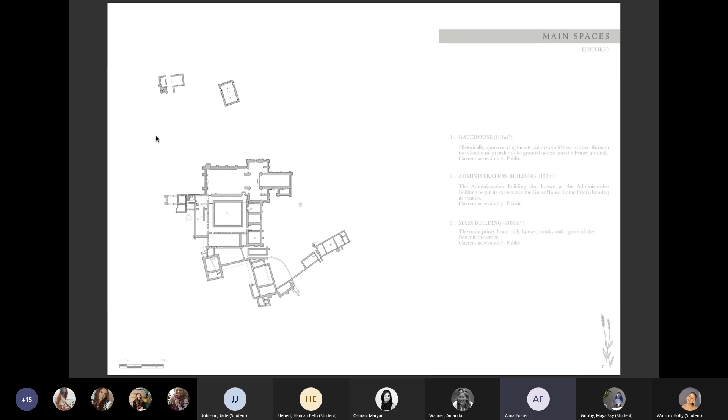So these are the main spaces. The big floor plan is the main ruin, and at the top I had a gatehouse and an administration building.

It was in a really strange location, like in the middle of a really dense housing estate, and then you'd turn a corner and it was just open green and really stunning. When you stood at the north of the site and looked south, it was all just the landscape, so it was really beautiful. In comparison it was a really nice contrast.

And you can see that all the houses are around.

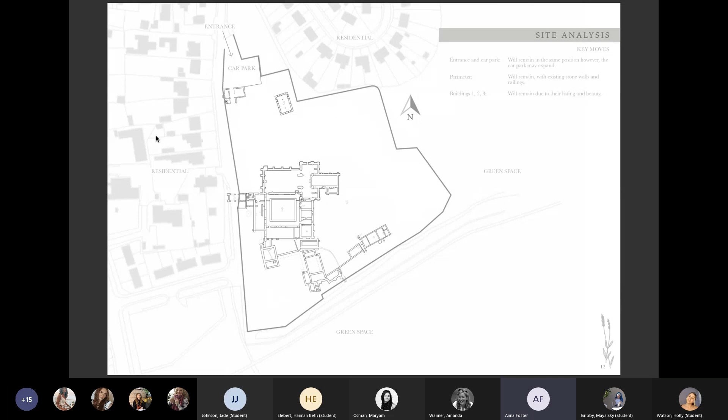There wasn't actually any plans for the site, which I would not recommend at all, so I drew all these up on site. I hired a drone off a really nice guy who let me do it all for free, which was really nice of him.

I took the iPad and took CAD and literally just sat on the grass with my Mac in the middle of Barnsley - would not recommend - with an umbrella over me, and drew these up.

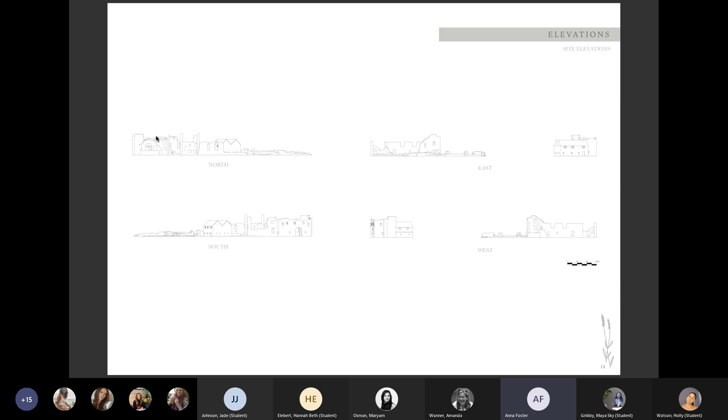These are the elevations, and as you can see there wasn't loads left of it, but I enjoyed that there was a solid floor plan to work with, which defined my spaces. It was quite overwhelming at times because it was a big site, and obviously there isn't masses left of it.

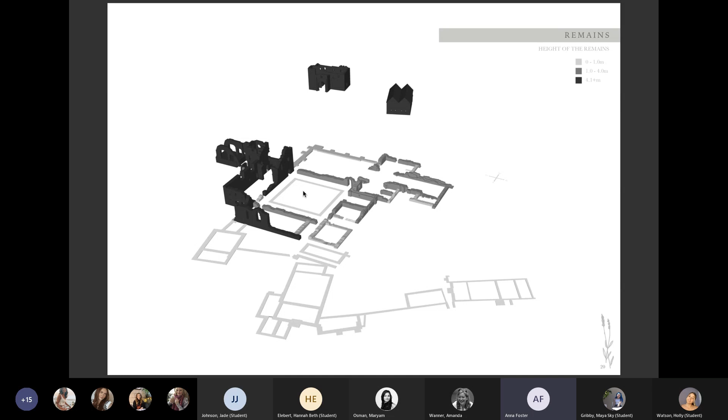But in the sense that it was mapped out, it was quite handy because it almost gave me a route around the site. In the centre, where that square is, that's the cloister - that was actually originally open, like their garden. That was nice to link to the route around site, because that could then be my main garden where all the herbs and natural remedies would grow.

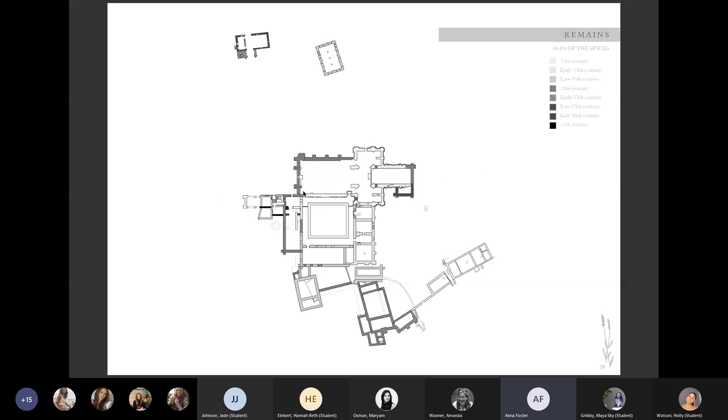Just the ages, and then the different spaces, and then this was part of the drone photography I did. For each space I did drone photography, a little bit about the history, the floor plans and elevations, a little model, and then either concept or key moves.

So from the history of the space, I figured out what concept I was going to take forward into my brief. For example, with this one, this is the gatehouse that was at the front of the building, and everyone would pass there usually. Even though when I actually went, the site was totally open - you don't have to go through the gatehouse at all, it was all just vast space you could walk through.

When it was originally a monastery, everyone would have to go through the gatehouse. So I ended up creating that concept into my design, making sure everyone had to walk through there, and I ended up doing it with hedges to make it more natural, fencing off the vast open space you would usually walk straight into.

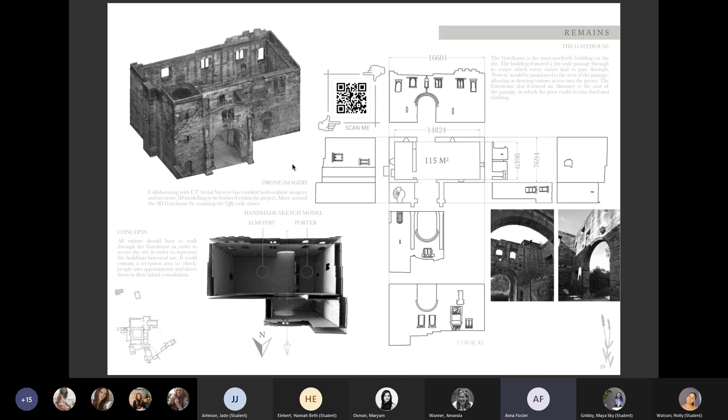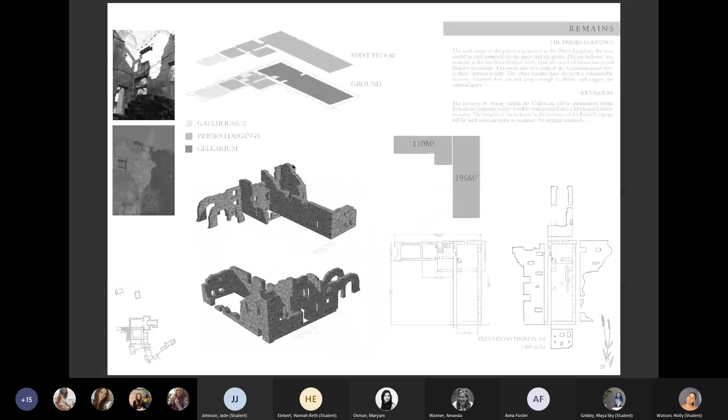So I just really linked every single space to a concept that was to do with its original use.

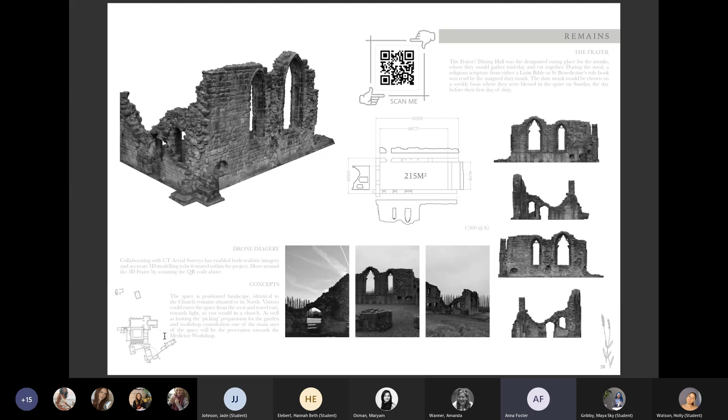I'd also really recommend doing this in the corner, if you've got a big space like mine - just highlighting what space you're talking about. Because when you talk about your project like 100 million times, to you it's really obvious, but I think it's good when you're speaking to someone else so they can keep up with where you're going on about.

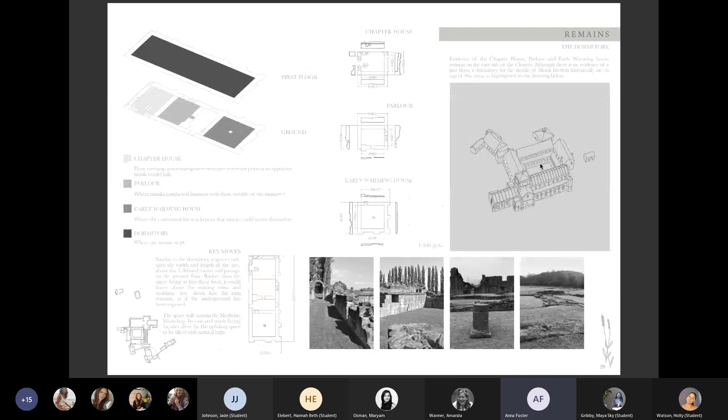Oh, and this is a drawing of how it used to be. So when I was talking about the central garden, that's the space in the middle. And that's just the ghost of the building over the current ruin.

About Benedictine monks - this was the Benedictine monk timetable, which was actually a lot busier than I thought. When I think of monks, I kind of just think of peaceful, resting, calm, but it was actually quite full on. They'd wake up at 2 and then go to bed at 6, and they'd just be on a constant rotation of jobs, chores, and things.

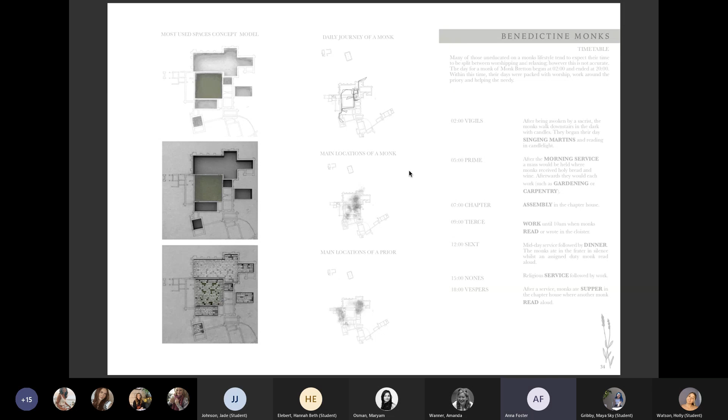So I focused on the route around the site and where the main locations were, and I used that concept for the wearable concept. So my wearable concept looks quite dark - it wasn't intended to be so dark looking.

I dressed in a tunic like the monks would, and Benedictine monks wore black, so that's how I was in black. And then I was on a puppeteer structure to show the control that the prior had over the monks - obviously willingly, so they were allowing themselves to have that control.

When I did the hand-in, I was led by my friend who was dressed in black, by this rope around my waist - so that was them leading. Then I had a rope to my arms and my feet, and I had the timetable names like Vigils and Prime across my face to show the lack of identity you had - you were all just one of the monks, you weren't John. It's just removing that identity, and the identity of the person before they became a monk.

It's really hard to try and remember everything. I think that's it - that's great.

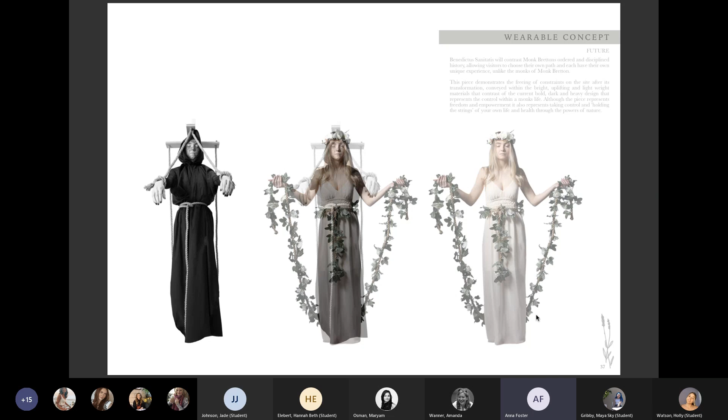I ended up handing it in as a pair, so I did the contrast afterwards. That's kind of taking the own reins on my health and how I tried different things to try and basically just get myself out of a really horrible time. So it's taking the own reins, and nature taking over, wrapping around the rope.

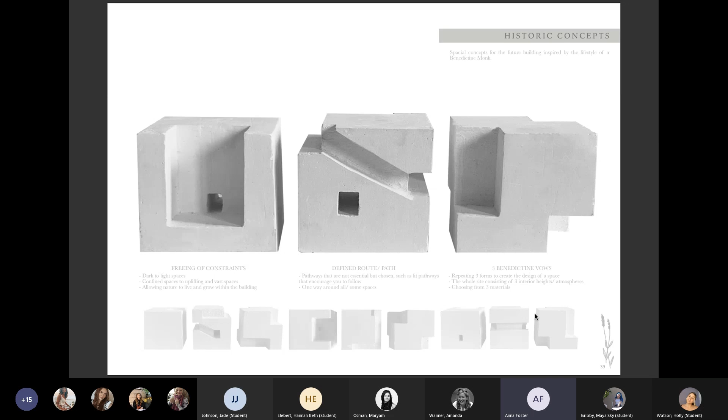These are some concepts: the freeing of constraints, defined path and route, and the three Benedictine vows. I ended up using them all quite subtly, and I explained where I'd used them within the design afterwards. But I think the main one I used was the three Benedictine vows, because that was the pillar of being a Benedictine monk, basically. So this concept of doing things within threes.

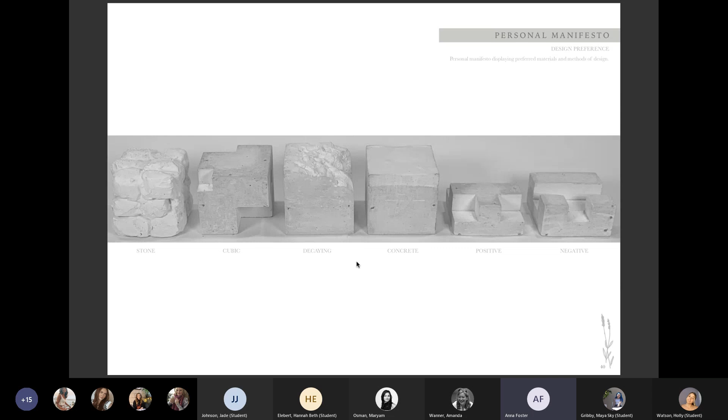This is my personal manifesto of how I like to design and everything I like. I guess the decaying aspect and the stone aspect ended up being within my project quite heavily, which is why I chose the project. It was really attracted to me. This is my personal manifesto.

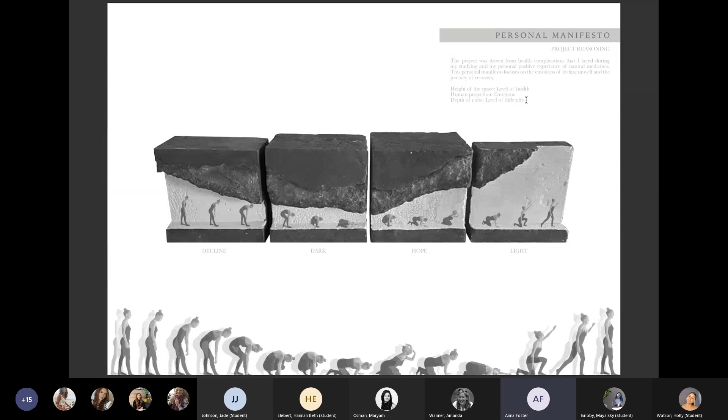It didn't actually photograph very well, but I acted out how I was feeling across the illness and how it got worse, then there was hope, and I ended up getting better at the end. I put that into stages and decayed the rock to represent each stage. So the height of the space represents the level of health, the human projection represents the emotions, and the depth of the cube represents the level of difficulty.

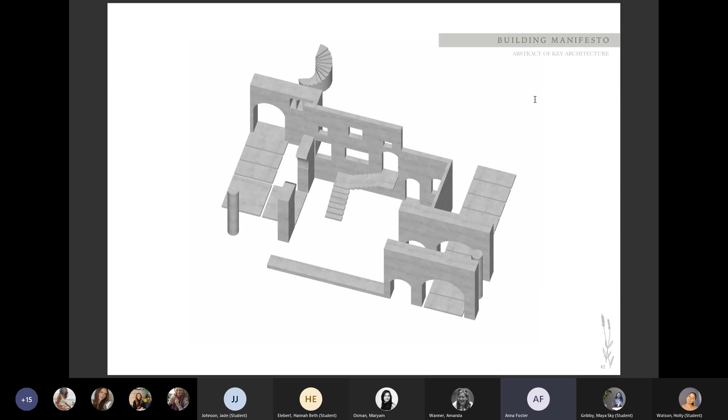I used the floor plan, but I didn't use the current architecture. I literally drew over the floor plan into a shape, and then put these shapes that I'd taken from site over them. So it's really abstract, but it gives you the language of what's currently there. And here I just explained where I'd got all of these different shapes from.

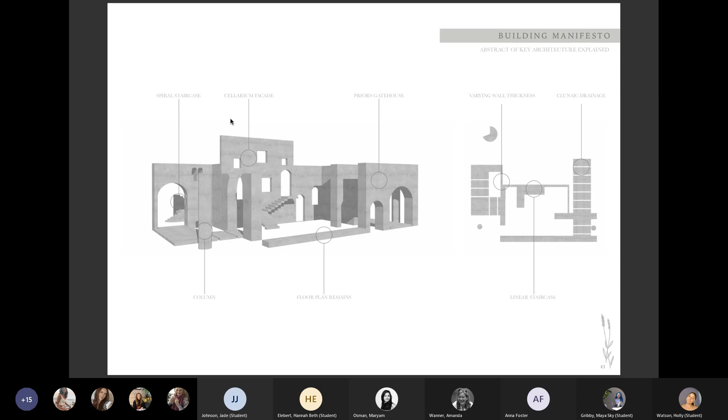That's turning what I did before into something a bit more conceptual, using the three Benedictine vows—so repeating things three times, exposing the structure, and nature's takeover.

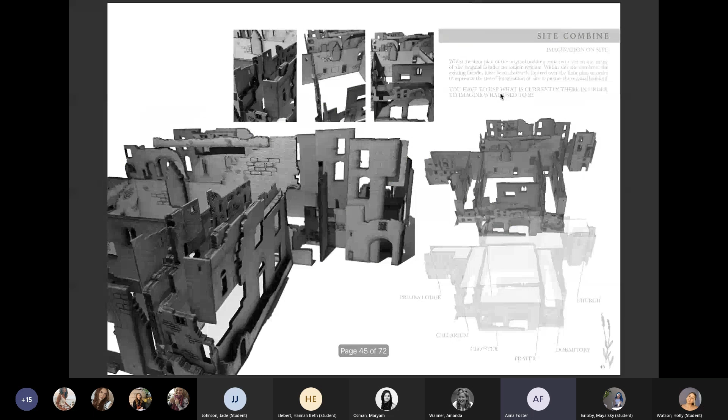This was my site combine, the same kind of concept as the one before, where when you're at site you have to use what's there to imagine what used to be. This one was really abstract, and I used the floor plan because you can see that now, but I used only the elevations that are currently there. So I layered and cut loads of those and laid them over each other to the height of what you would imagine it used to be.

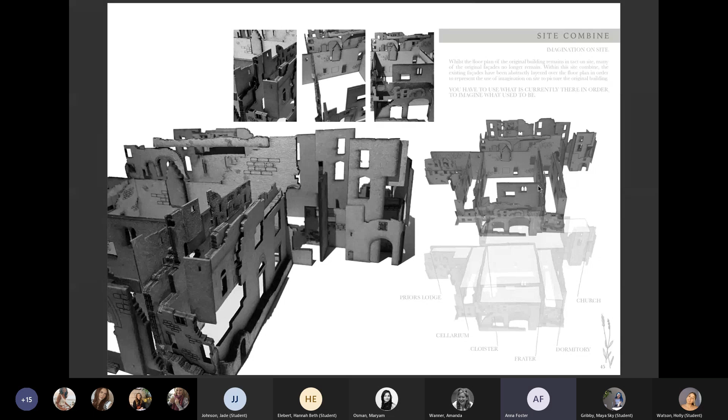Obviously you don't imagine it would look like that, that's why it's really abstract. But I used that to create some really eerie shadows, which you do actually get when you're on site. It gave you the atmosphere that you get when the sun sets.

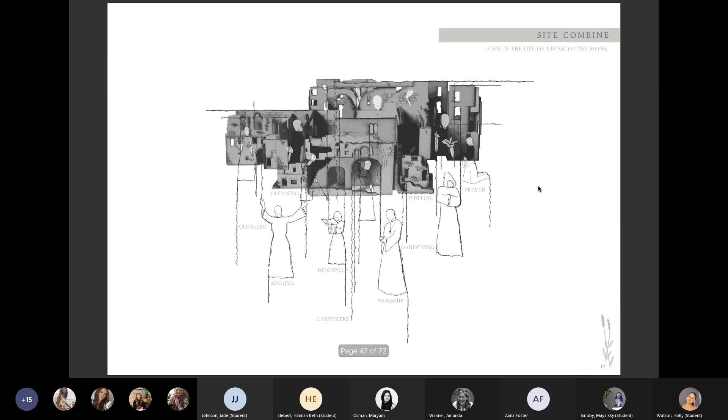This was just about the sense of sound that you get when you're on site. It's really silent as well, and considering it's in a busy residential area and quite near a main road, it's so silent when you're on the site, and you can just hear all the nature. Obviously this looks really dark, but you can hear all the nature, and it is really pleasant and nice. But I was thinking back to how it used to be, with the church bells and things.

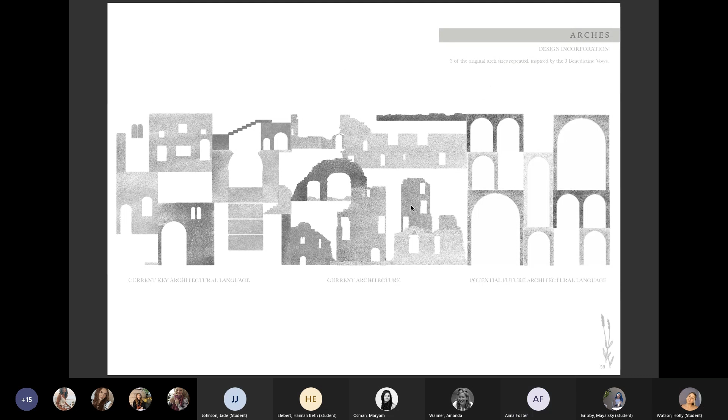So I got quite into arches, and there's a lot of arch language, or remains of arches, on site. And I just did some spatial concepts.

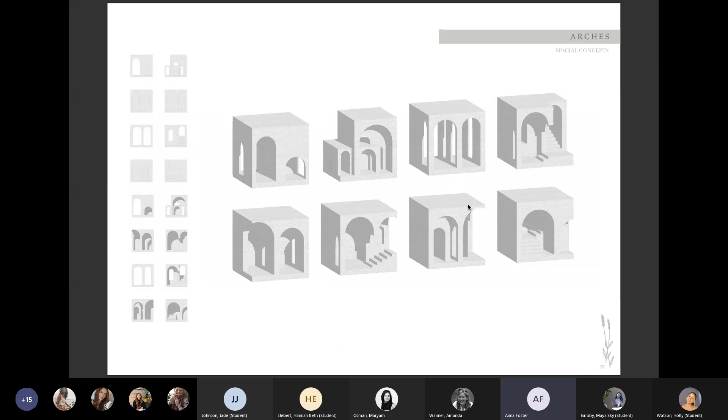I thought about how I could use light with the ruin—so having a wall and a light gap onto the existing wall, and light under the floor to show the ruin beneath. I actually ended up using this one, putting a flooring above my very small remains and almost making it look like it had been excavated, even though I'd actually just built on top.

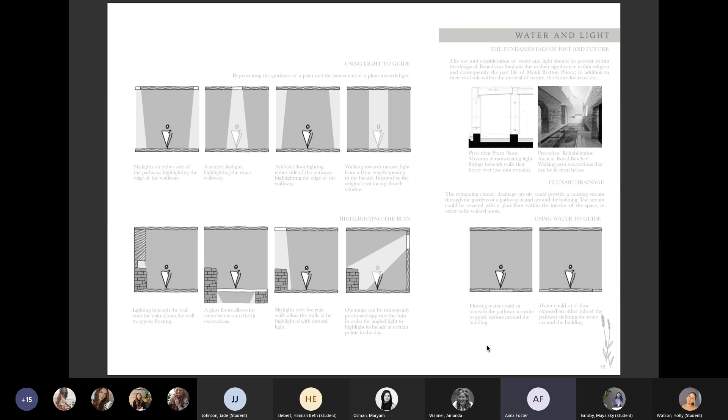And then I thought about water, because of the link to nature, and there was a lot of links to water on site with the old systems that were still partially evident. So water underneath the floor to guide you around site, or water on the side, almost creating like a moat.

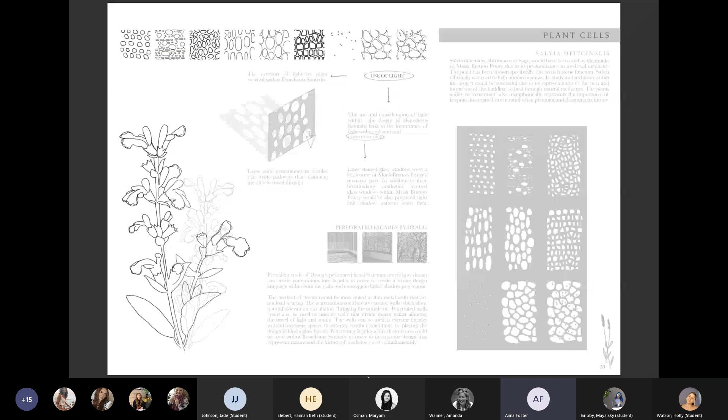So I specifically looked at sage and researched all of its forms, as well as plant cells and the structure of plant cells, and how I could use that within the installations.

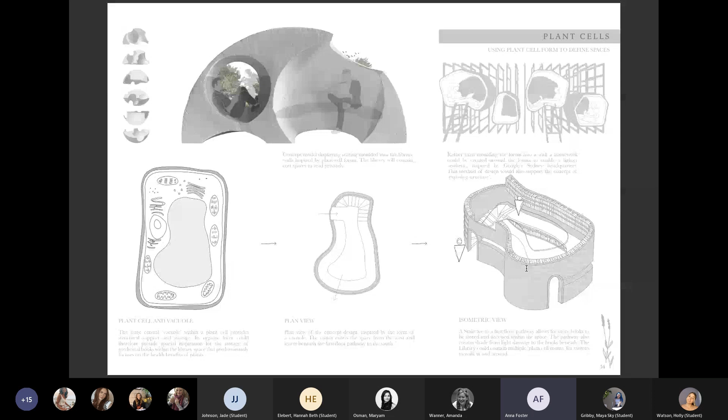These were my spaces: the library, the consultation, the medicine garden, the medicine workshop, the shop and tea room, and the sensory garden. Those were the major spaces, and the minor spaces were the gatehouse and the history of the priory, which was a small room dedicated to the monastery, plus a seedling house, picking preparation, workshop consultation, monastic garden, and garden storage.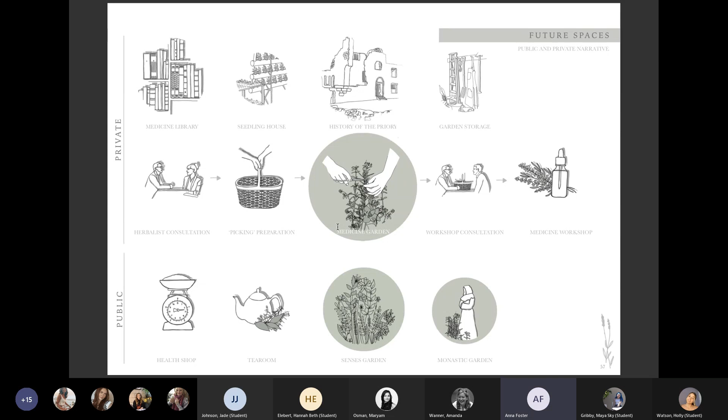I then did some diagrams to show each space and the journey a customer would go through.

Those are my future spaces, public and private. I labelled the outdoor and indoor spaces, because it was quite hard to show which ones would be outdoor and indoor, since the whole site at the moment was outdoor.

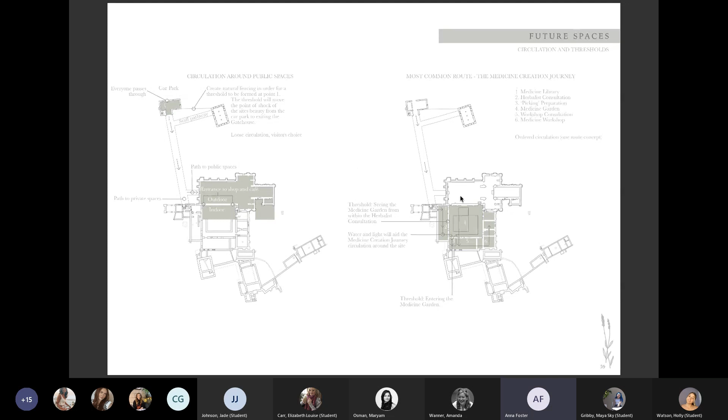And then this is my circulation idea, and these are my spatial concepts.

I was quite lucky with the site because there were a lot of concepts, as the history was so in depth. At the end of semester one, I wrote down all of the concepts that I'd gotten from the spaces.

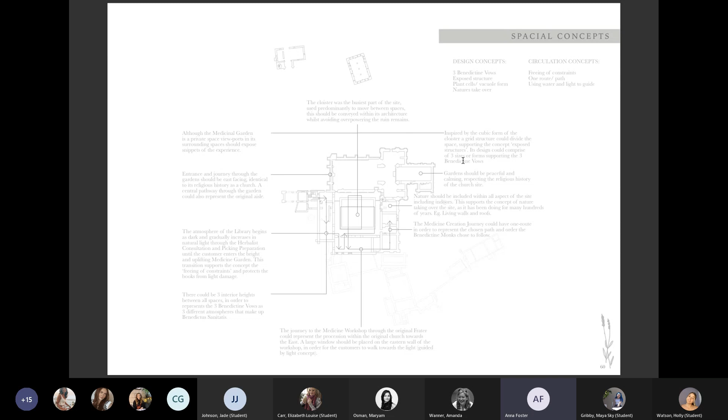It was quite good actually when I came to design in semester two and had a bit of a mind blank - you could look back and see all the concepts that link to the history.

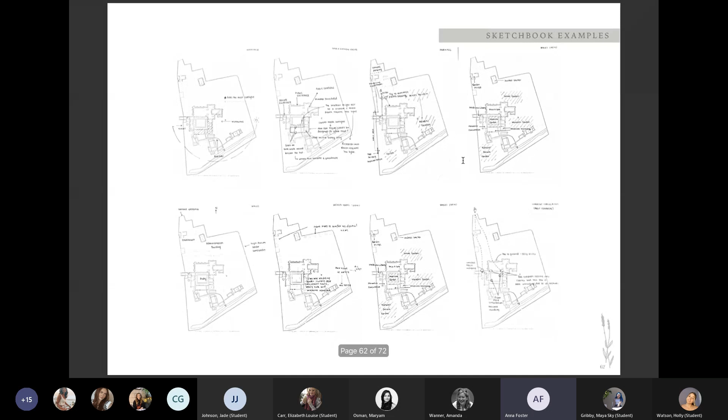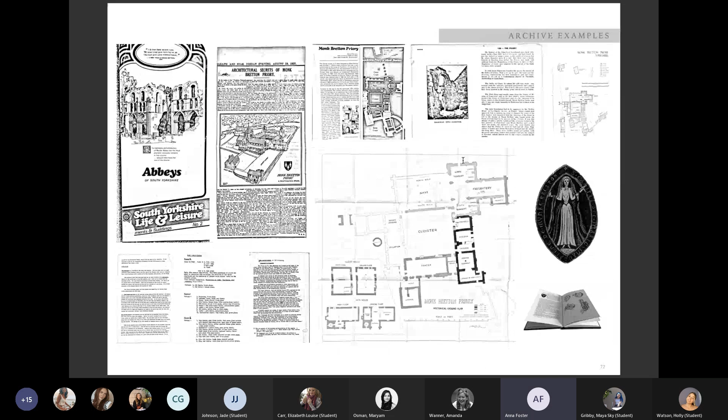I then scanned in some of my sketchbook - I didn't do all of it, just a few bits - some sketchbook pages at the end, and my research as well from the library. So that's semester one.

Am I going too fast, Maryam, or is that fine? No, it's perfect, thank you. Okay.

This was looking into the future structure of the building, and I did some lino etching as well of the ashlar and the rubble on the inside, of what construction remained.

It was really nice actually because all the elevations were missing, so I could get a full section of the rock, which was really nice.

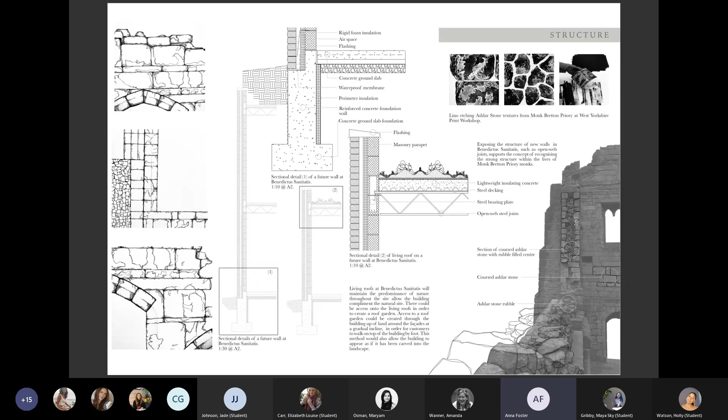So that was just the concept of the 3 Benedictine vows again, just exploring that.

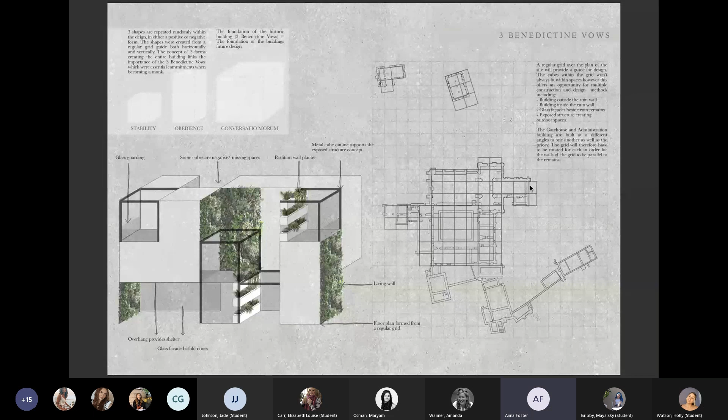I had a look into vertical farming, and I ended up designing my own system that was sustainable to the water on site.

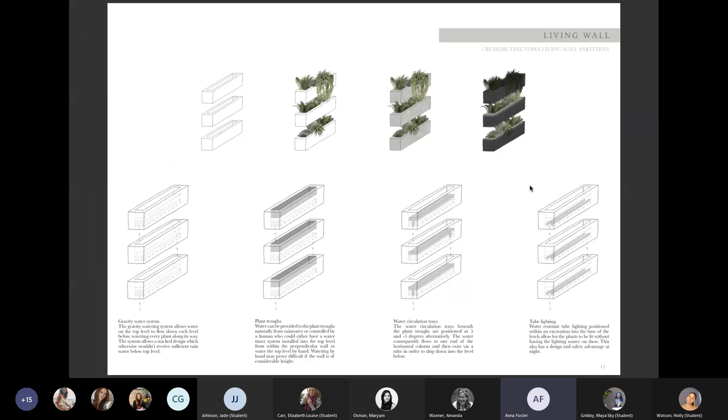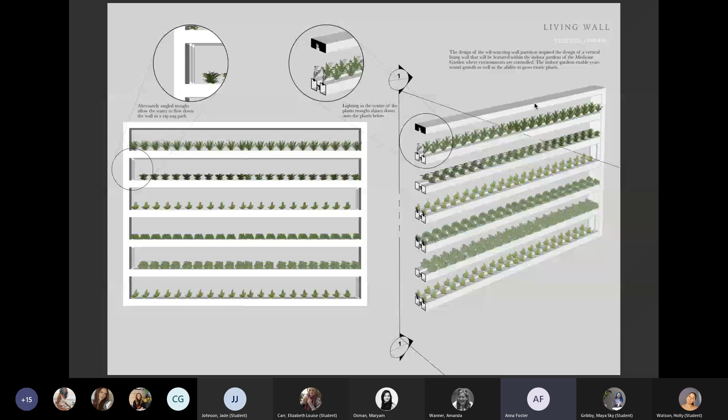This structure was used in the seedling house to grow the plants to a certain size before they were planted in the main garden. Arches again.

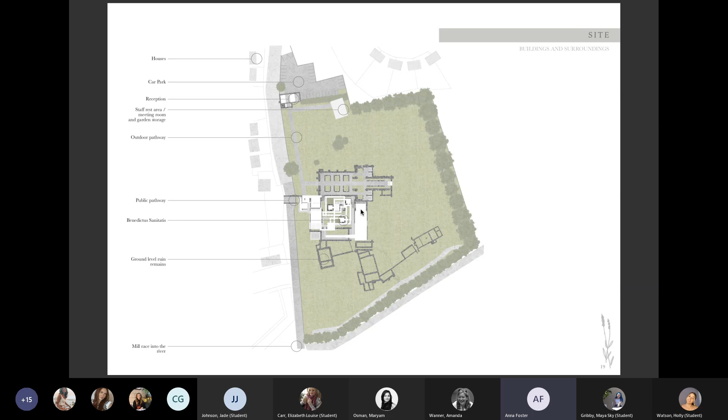So the sensory garden was open to the public, as was the tea room, and then the library was a membership, and the actual journey was private, so just on a booking system.

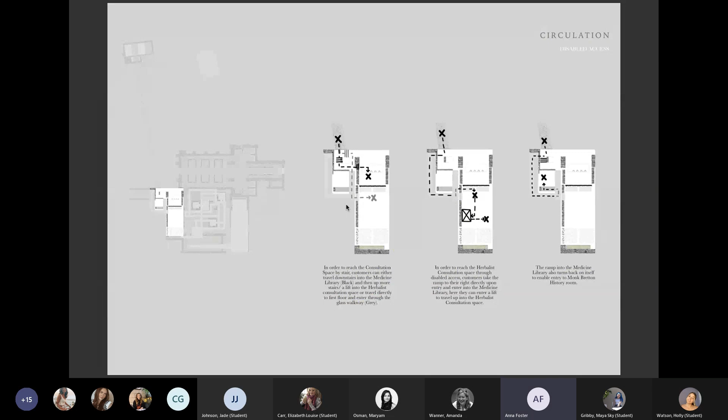So those are my public and private spaces, the route around the space, disabled access, and different seasonal routes, because obviously you can't go outside and pick the plants all the time.

Seedlings. I've gone off it.

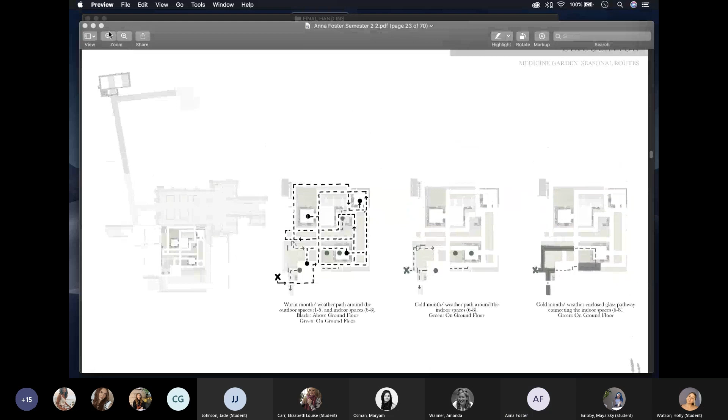And that would have the... I can't think of what they're called, like the plantation walls almost, and that was like feeding - obviously you'd fit a lot more plants in them than you would planted normally. So I ended up having 3 spaces that were kind of like a greenhouse with loads of those in, so that in winter the place could still be open.

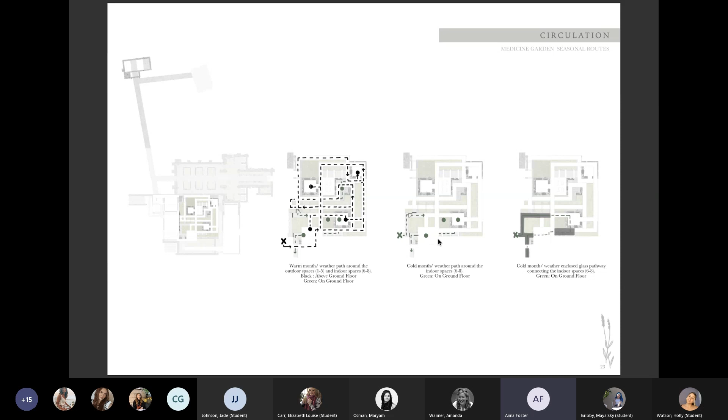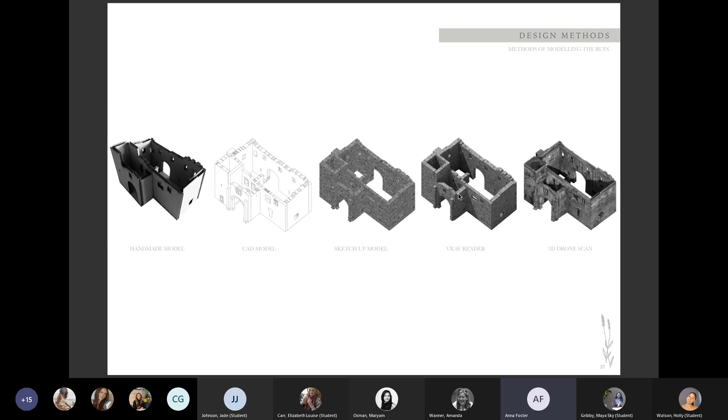And these are the floor plans, and these are the different design methods I used: a handmade model, CAD model, SketchUp model, a V-Ray render from the SketchUp, and a 3D drone scan.

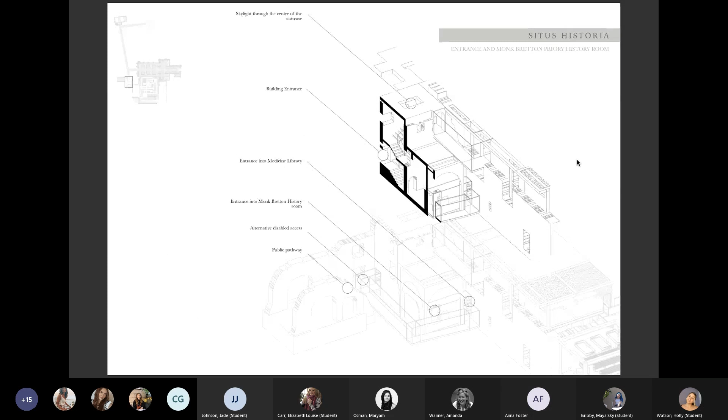And then these are all my spaces.

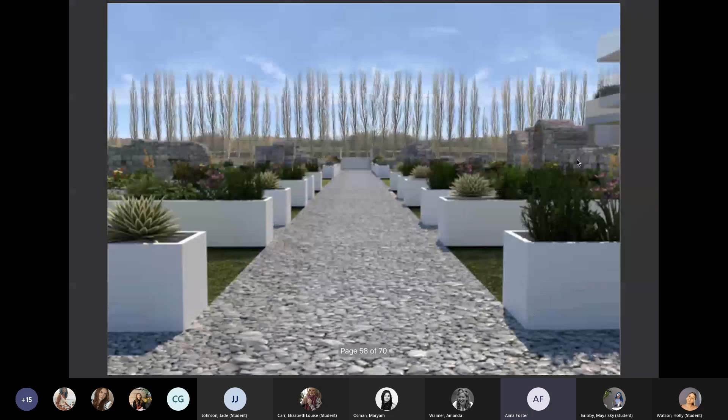That's the greenhouse room I was talking about. In the summer you'd go around all the different levels, and your list would be numbered. So you'd have all your ingredients in order - you might have 3 from garden 1, and it'd be obvious, I think there was 8 gardens. You'd go into the square - each garden was just a square, so you could keep track of which one you're in, numbered as well. You'd go on a pathway to all the different ones, and there was 3 at the bottom.

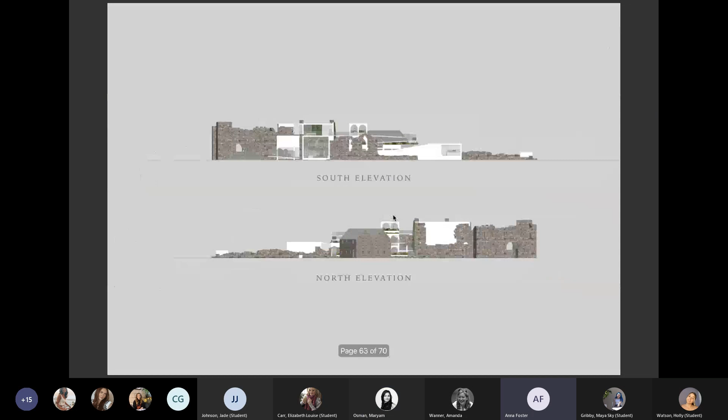For winter. Anna, do you mind just explaining your spaces through the visuals that you did as well? Yeah, of course, thank you. These sections you mean, or through the actual visuals? The visuals, yeah, and then these just kind of point out what the spaces are that you created. Oh sorry, I'm even breaking up - the visualizations.

Can you hear me? Yes, yeah, I can. Can you still see my screen? Yes. Right, it's gone.

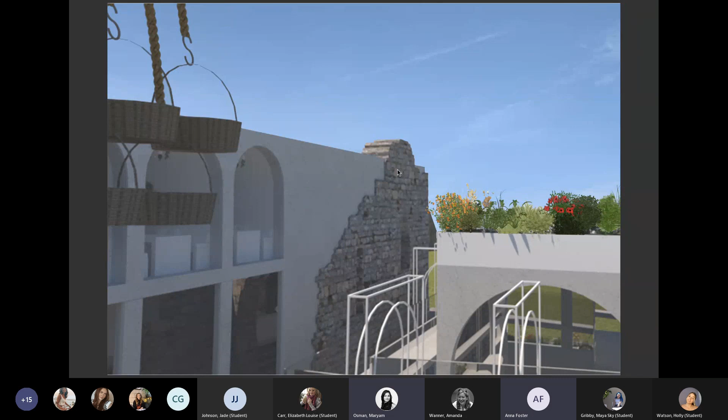Okay, did you just mean these visuals? Yeah please. So this was at the consultation space which overlooked the garden. This was the history room - so this is the site as it is, and then I had projections of all the archive material on the wall. It's quite a dark space, so the projections would be nice and bright.

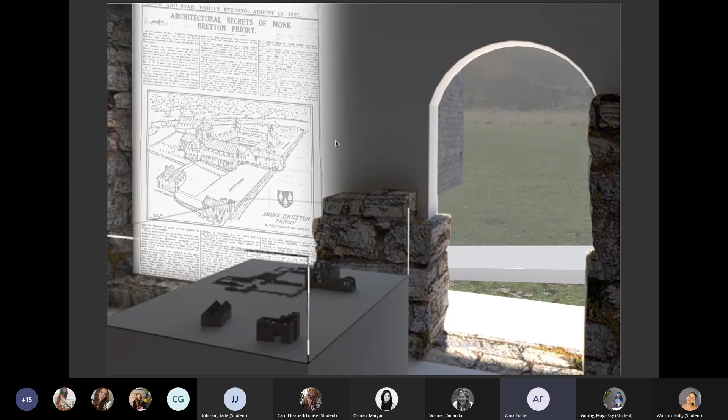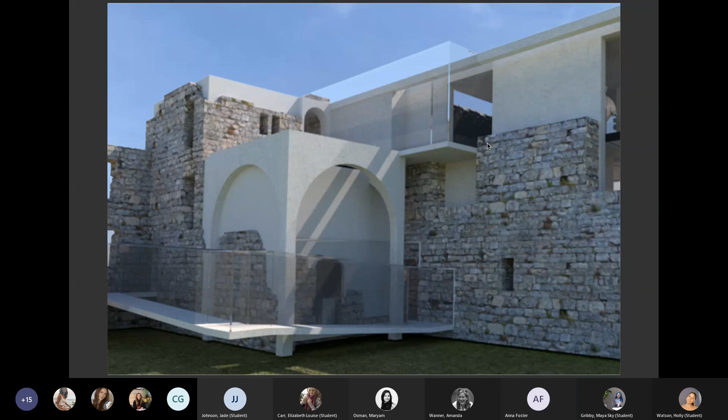This was from the side of the site - this was the history room, and this was the consultation space up here. So you'd walk in here, and that was the history room we just saw. That's the main staircase, and then I had to do a path round here and into here, which is actually there, so that I could have a lift.

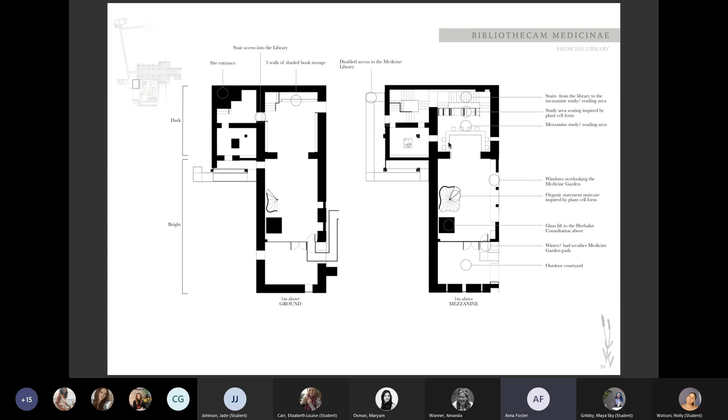That was really hard actually, because there was just stone staircases right in the entrance. I had to try and find another way for a lift, and I managed to divert the route. Then there was a library under here, and a study space that was a little bit higher, which is up there.

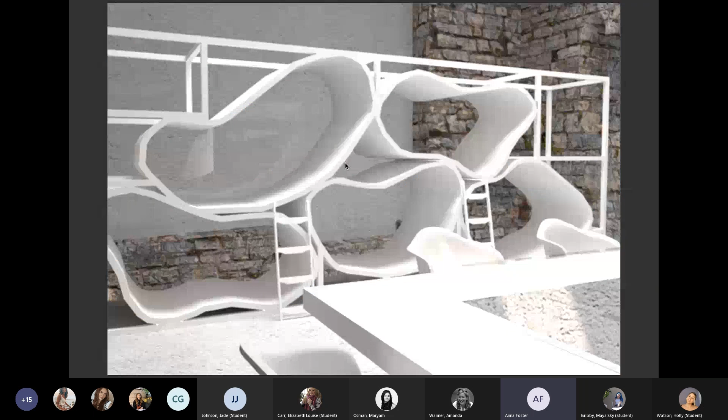And then I had this seating, which is based on the organic plant cells. And then you go up into the consultation rooms - so these are the consultation rooms, and they overlooked the medicine garden.

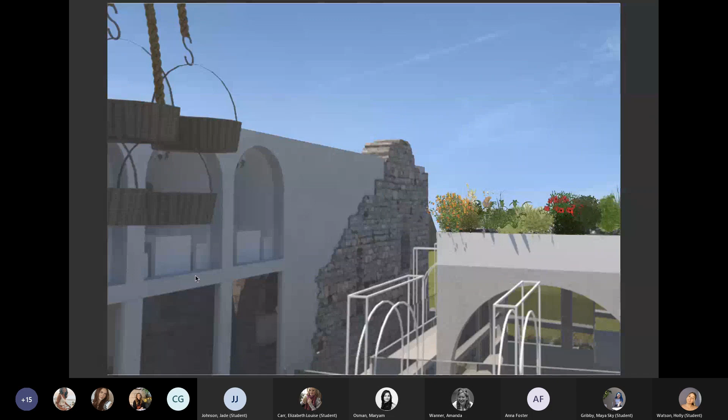This was the picking preparation at the start of the medicine garden, so you get your basket and things. And then you'd go - it was a one-way system, so you wouldn't get that. This was the seedling house, which was just like a staff space really, where all the seedlings would grow.

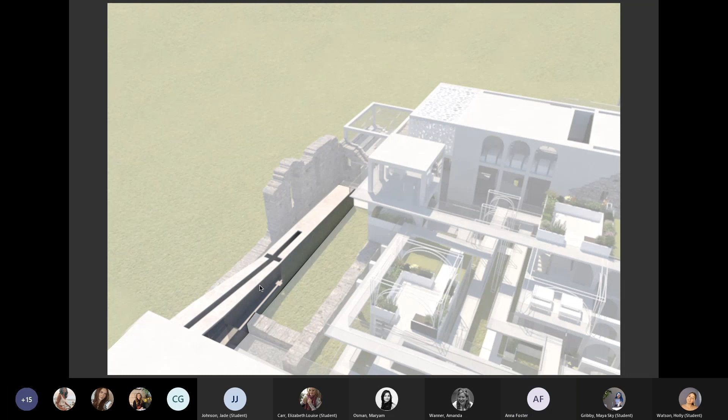This was like the procession towards the medicine workshop. After you've done the journey, you'd come into here, and go down here, and at the end of this wall it was all glass, so it went from quite dark to really bright at the end - almost like when I was getting better, that sense of relief you'd reached the end of a real dark tunnel. It also links to the church concept of heading towards the light.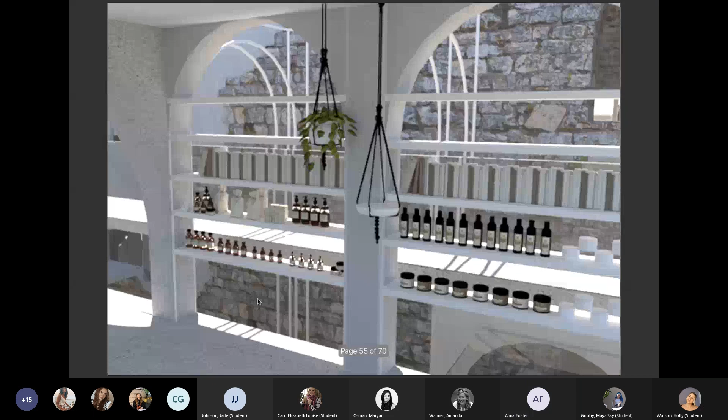The visuals don't show it that well, but this is where I'd built above the ruin. This is the medicine workshop, and this was the little shop on top of the tea room. This is explaining the senses garden, the different senses as you went along, and then a monastic garden at the end.

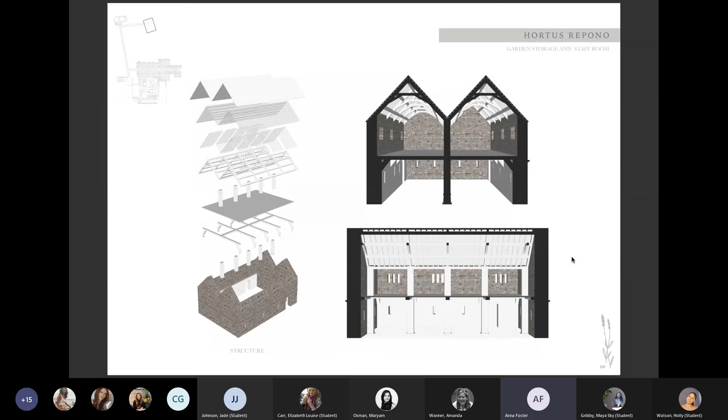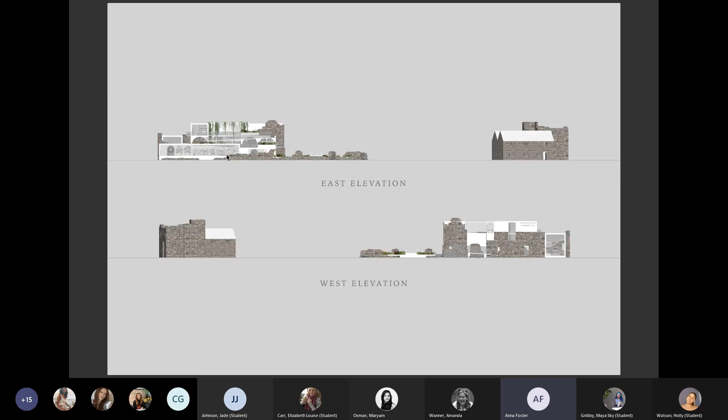That's the garden storage on top of the site, and I just had a staff area at the top. And then my elevations - this is the medicine workshop, this is the consultation, and all of this is the garden.

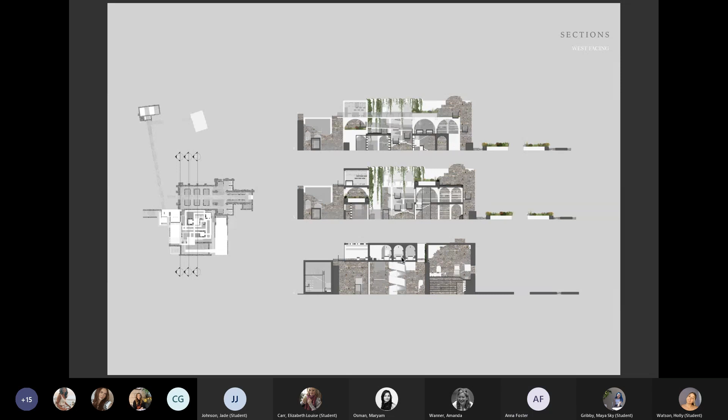This is the library, and then the study area, and the main circulation to the consultation space. This is from the south, so you enter here, the staircase, or going round to the lift, the library, study space, the senses garden, and the main garden, and then into the workshop there.

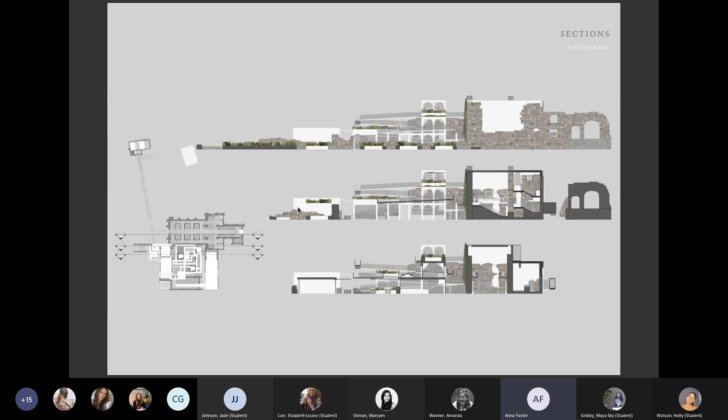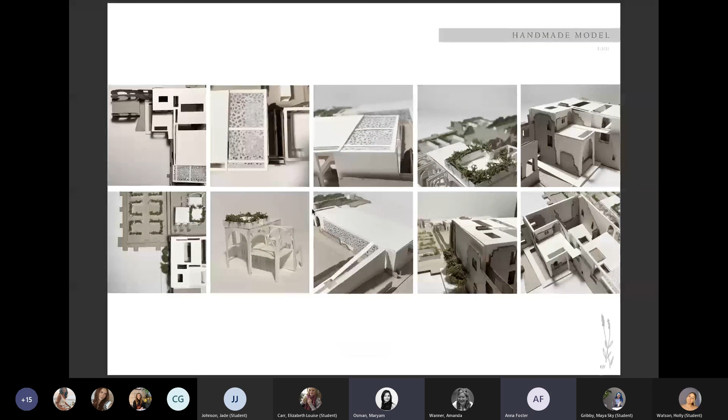And this is my model. That's it, I think. That's brilliant - thank you so much, Anna.